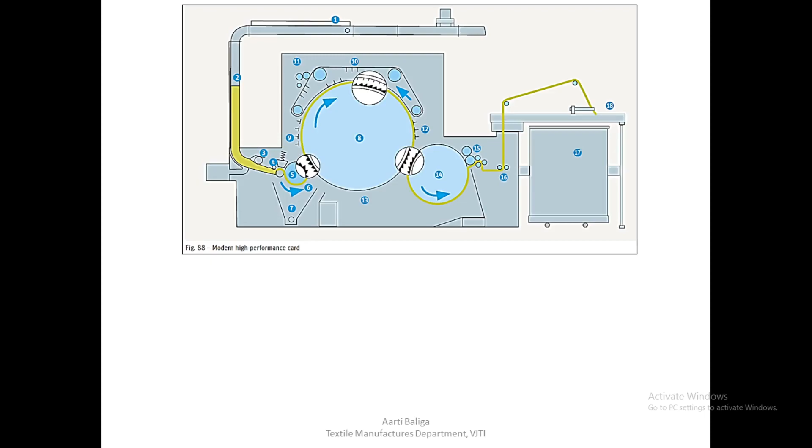Hello, today we shall study the feed and delivery of the card. This is the card which we have seen superficially, and we have seen all the parts. Let us now concentrate on each and every part here. We have already studied the cylinder and the flats in detail, so now today we are going to study the licker-in and the cylinder as well as the feed roller area.

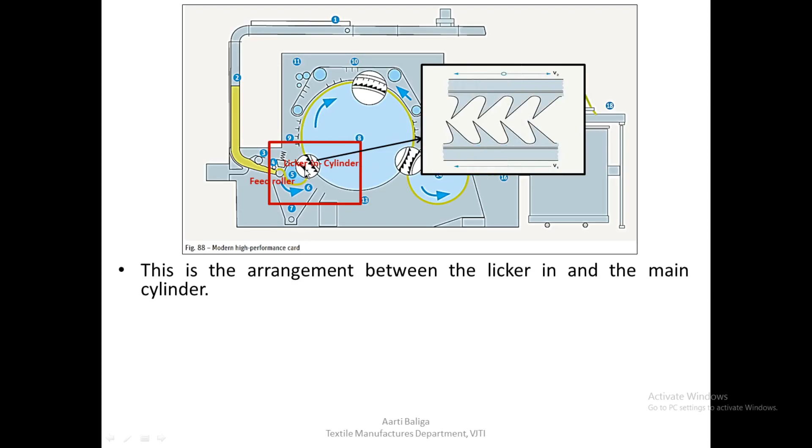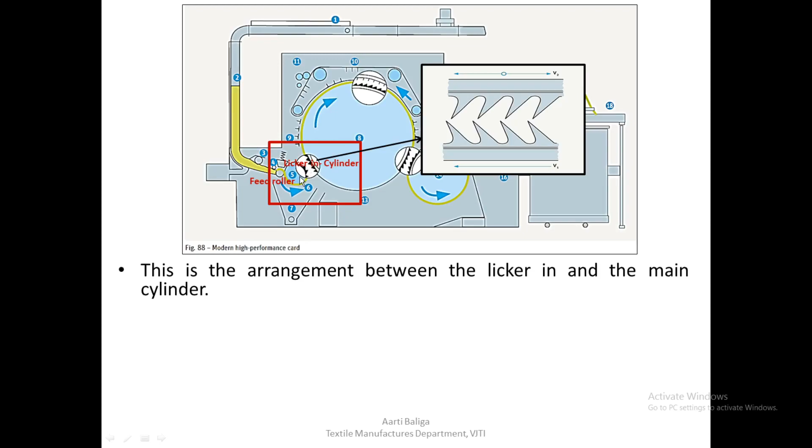This is the arrangement between the licker-in and the main cylinder, showing the arrangement of teeth between them. As one can see, the wires are pointing in the same direction, unlike before when we studied between cylinder and flats, where it points opposite for carding to take place. Here it is in the same direction, because we need the licker-in to transport or give the fibers to the cylinder. The teeth of both the clothing surfaces face in the same direction, as one can see.

This arrangement is typical of the licker-in main cylinder region. Here there is a deliberate transfer of material from one clothing surface to the other, but V1 must be greater than V2. That means the feed clothing surface speed, V2, must be less. The cylinder surface speed therefore must be greater than the licker-in speed.

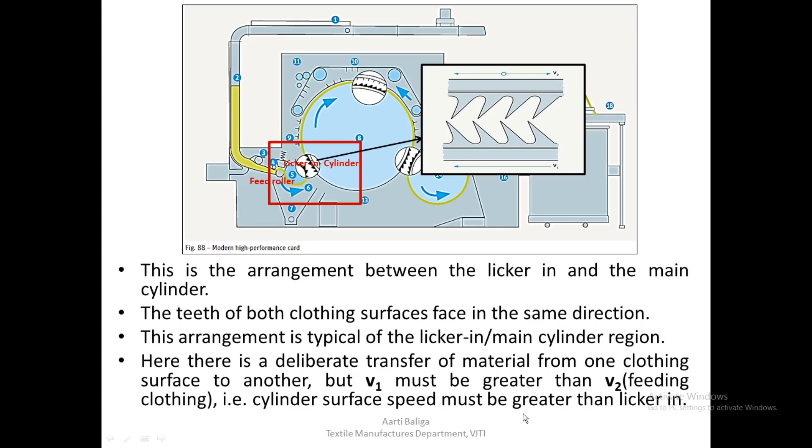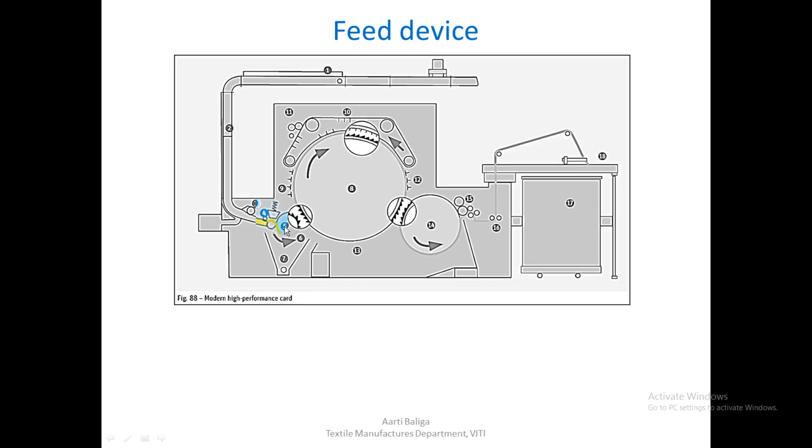So now let us look at the feed device. This is the feed device. We are going to look at the feed roller and the licker-in. It can be seen here, an enlarged view of this small feed roller, and one can see the plate at the top, and this is your licker-in.

Feed roller 2 is located below, and feed plate 1 is pressed against the roller by a spring. There is a spring here, and by spring pressure this is pressed against the feed roller. Licker-in 3 rotates in the anti-clockwise direction, while the feed roller rotates in the clockwise direction. So the material will come from above the feed roller and go below the licker-in, like this.

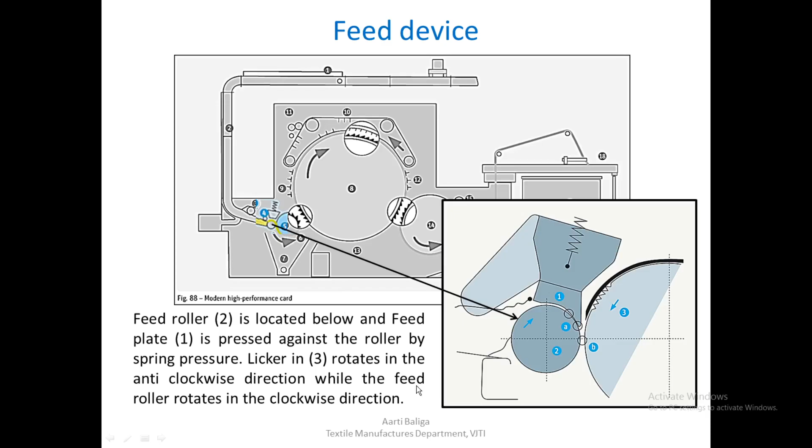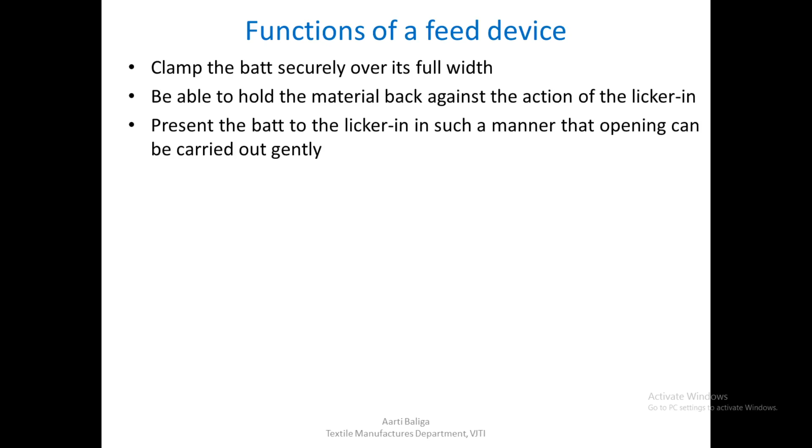So let us look at the functions of a feed device. It should clamp the batt securely over its entire width. It must be able to hold the material back against the action of the licker-in. It must be able to present the batt to the licker-in in such a manner that opening can be carried out very gently.

The licker-in here would have a very high speed which will try to pull out or pluck all the material that is held here. So to give some better resistance to the material flowing into the licker-in, flutes are given on the feed roller, which provide a very good grip and restrain the fibers from easily going into the licker-in.

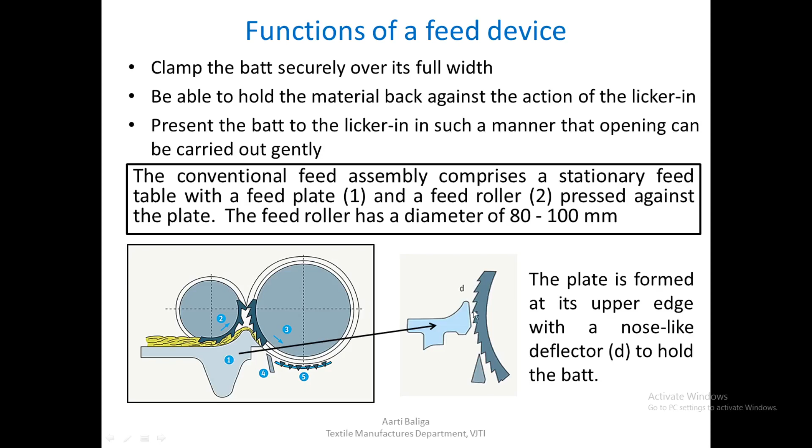So let us look at the detail of this conventional feed plate, which is shown over here. This is D over here, and this is the licker-in, this is the mote knife. The plate is formed at its upper edge with a nose-like deflector, shown here as D, to hold the batt.

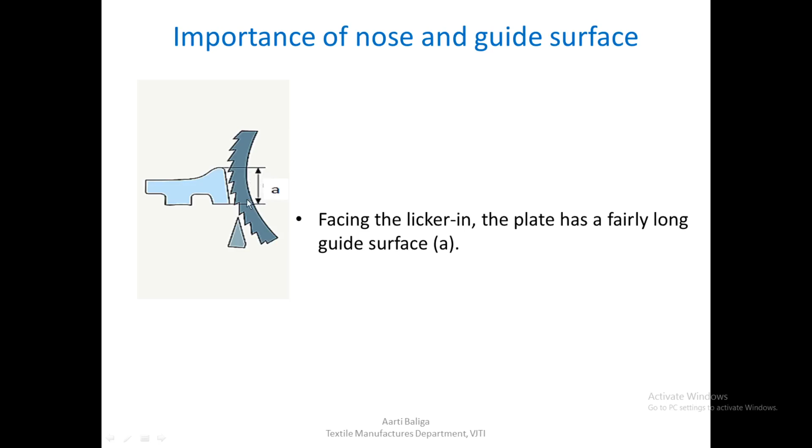Importance of the nose and the guide surface. Facing the licker-in, the plate has a fairly long guide surface, labeled A. As one can see if one looks at this height, it is shown as A, with a fairly long guide surface facing the licker-in. The deflector nose and the guide surface have a significant influence on the quality and also on the quantity of waste eliminated.

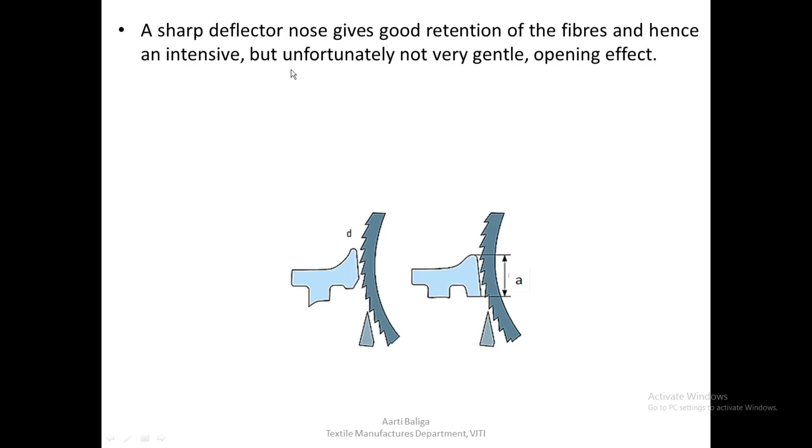A sharp deflector nose, something like this, gives good retention of the fibers and hence an intensive but unfortunately not very gentle opening effect. On the other hand, an over-rounded curve results in poor retention, so the fibers will not be held so securely, and also poor opening at the same time. In this case, the licker-in often tears out whole clumps of fibers.

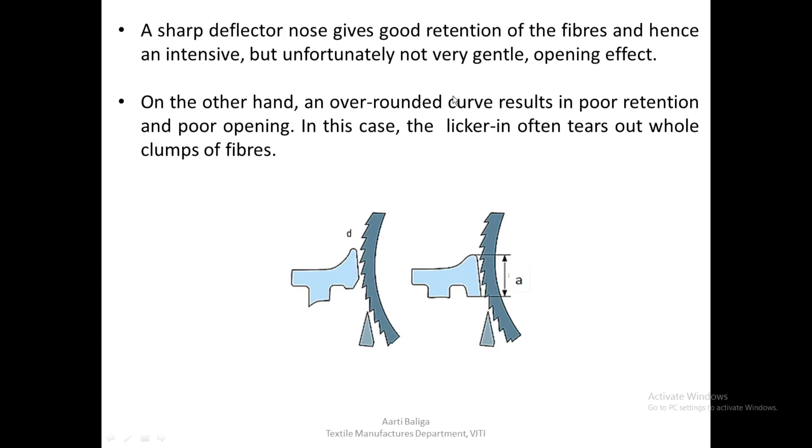So these are the two shapes of the nose and the influence they have on the retention of the fibers. The length of the guide surface also matters, which we have seen as the distance A. That also influences waste elimination.

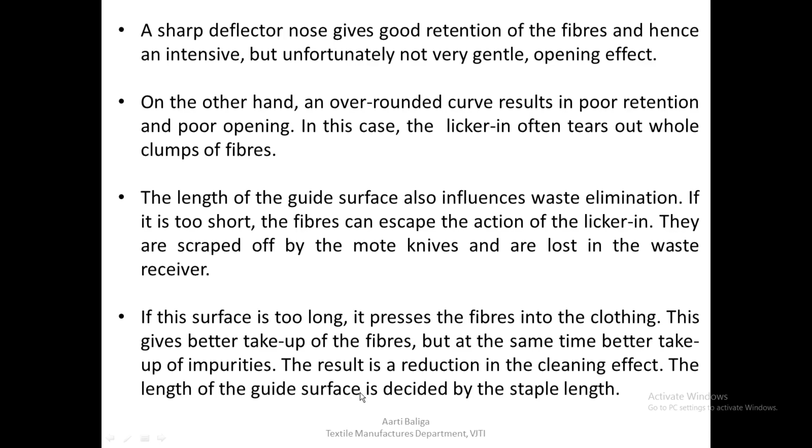If it is too short, the fibers can escape the action of the licker-in. They are scraped off by the mote knife and are lost in the waste receiver. If the surface is too long, it presses the fibers into the clothing. This gives better take-up of the fibers, but at the same time better take-up of impurities also, so the result is a reduction in the cleaning effect. The length of the guide surface is always decided by the staple length of the fiber being processed.

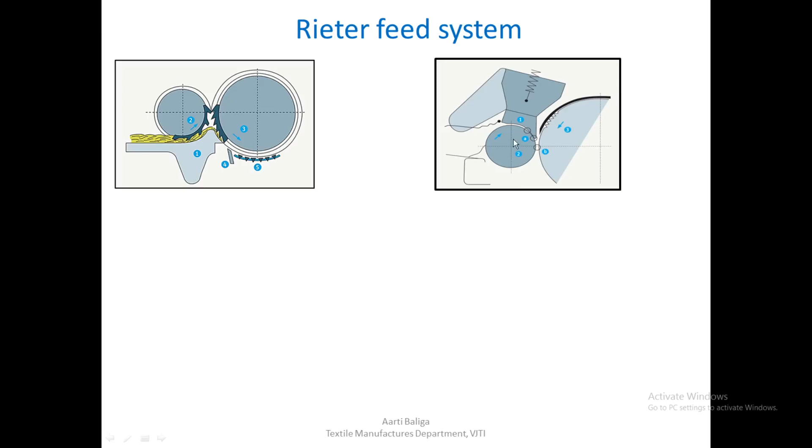Let us look at this. This kind of diversion, the conventional one, does not contribute to gentle fiber treatment. Hence Rieter has converted the feed system to enable material to be fed in the direction of rotation of the licker-in. The arrangement of the feed device is opposite to that of the conventional. The feed roller is located below and the plate is pressed against the roller by spring pressure.

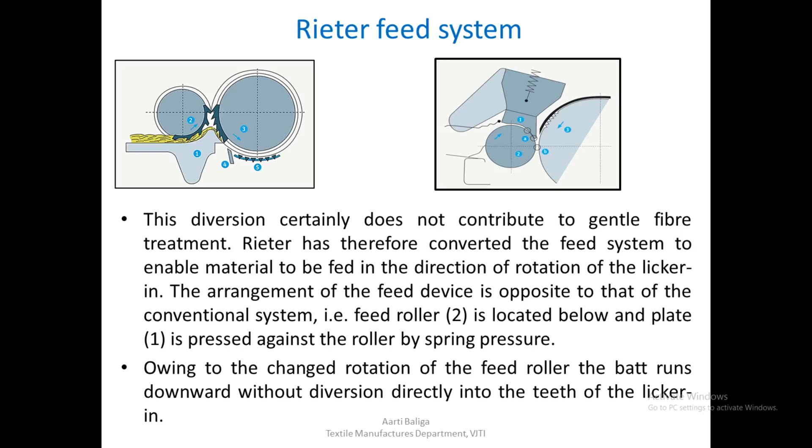Due to this change in rotation of the feed roller, the batt runs downwards without diversion directly into the teeth of the licker-in. So if we observe this system, the feed roller has to rotate in the clockwise direction, and the licker-in as before rotates in the anti-clockwise direction. What one can see is the material going directly, and in this region the material is moving downwards. The licker-in is also taking the material downwards and taking it onto itself. So what is happening is the material is smoothly taken away gently without any opposing forces, and the treatment given to the batt is much gentler.

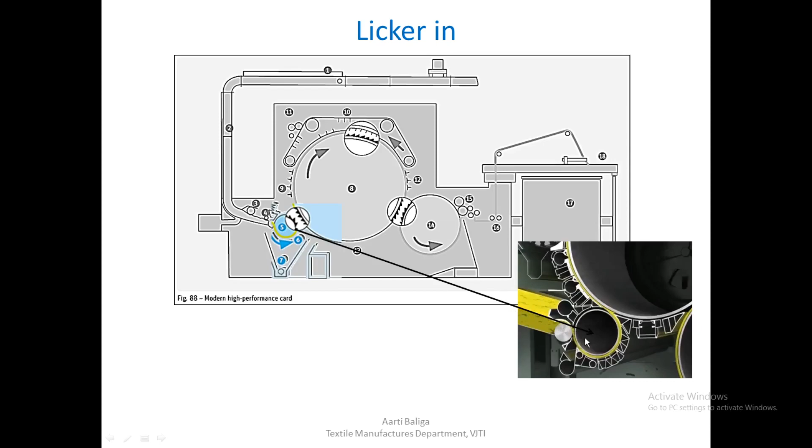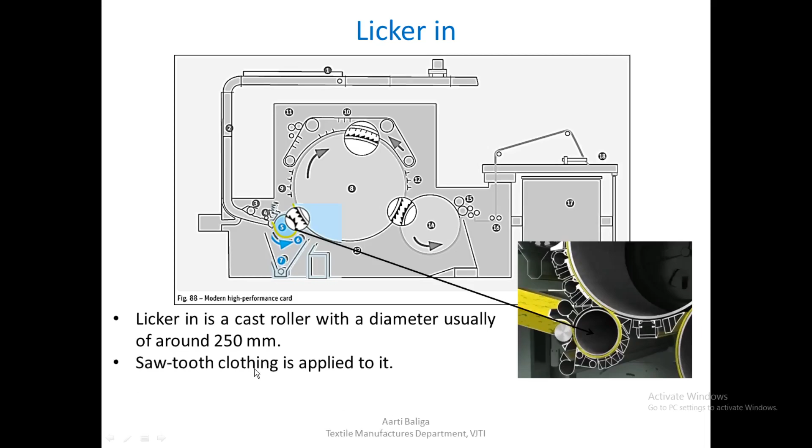This is the image. We have this feed roller, the Lickerin, and the cylinder. Lickerin is a cast roller with a diameter usually of around 250 mm, fitted with a sawtooth clothing. The Lickerin rotates anti-clockwise while the cylinder rotates clockwise. Now we are looking at the relation between the Lickerin and the cylinder.

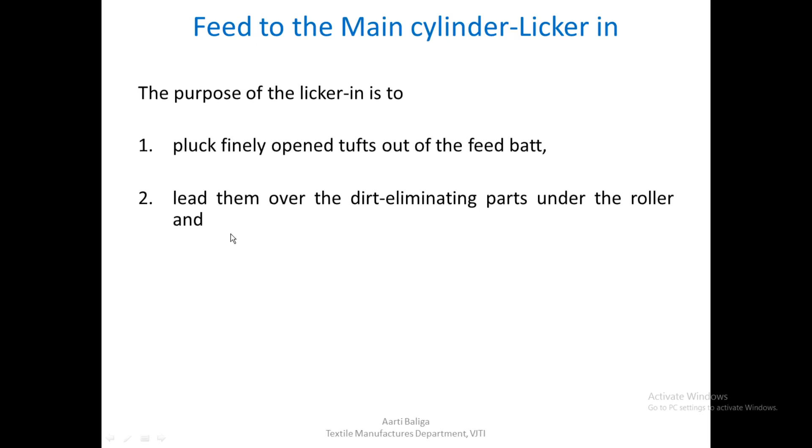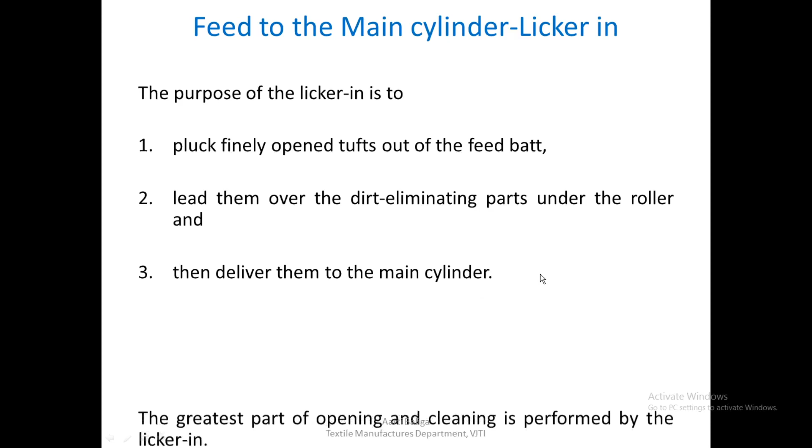Feed is given to the main cylinder by the Lickerin. The purpose of the Lickerin is first to pluck finely opened tufts out of the feed batt, lead them over the dirt eliminating parts under the roller, and then deliver them to the main cylinder. These are the three main functions of the Lickerin, and the greatest part of opening and cleaning is performed by the Lickerin only.

So, waste elimination in the card. Waste elimination takes place at three regions in the card: first below the Lickerin, secondly in the auxiliary elements, and third at the flats, which is the important place where again cleaning happens, or 100% impurities are removed, actually at the flat cleaning device. We shall see all three regions.

Since we are discussing the Lickerin, we shall first see the waste elimination area below the Lickerin. In the conventional system, this was the situation: waste elimination is very intensive and takes place under the Lickerin by means of special devices.

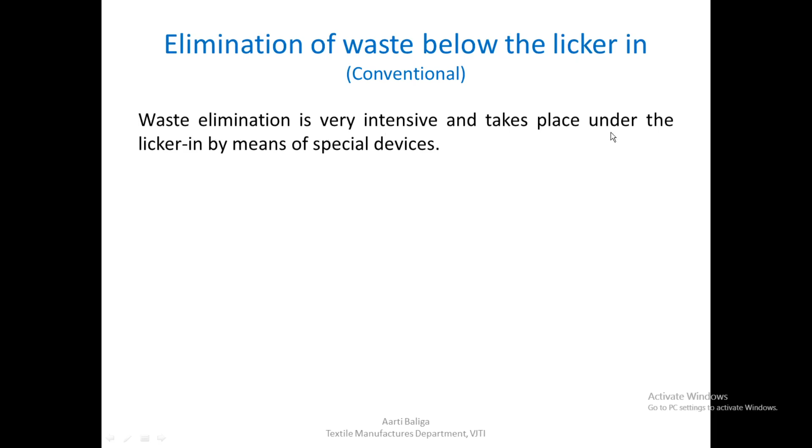The classic cleaning assembly consisted of one or two mote knives and a grid. In the old system, there were just one or two mote knives, which we shall see. There would have been a grid, which we studied during the Blow Room. It is nothing but cross-sectional, triangular cross-sectional rods fixed below the assembly, allowing the trash to pass through.

This grid, however, was half made of slotted sheets and the other half made of perforated sheets, so that whatever trash is removed by the Lickerin goes through these perforated or slotted sheets and into the trash box.

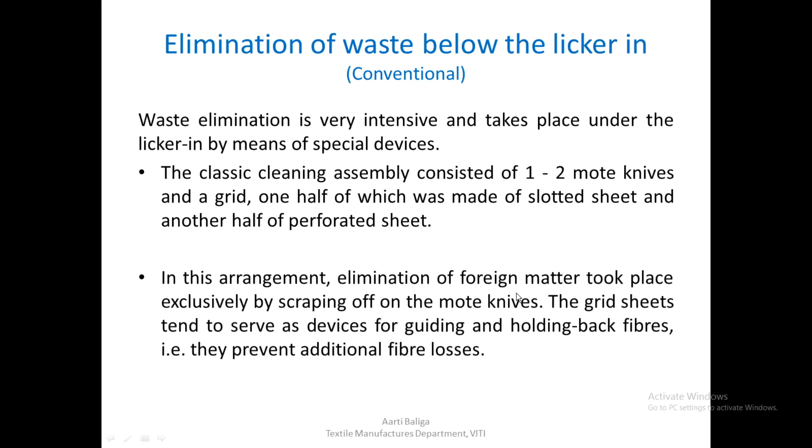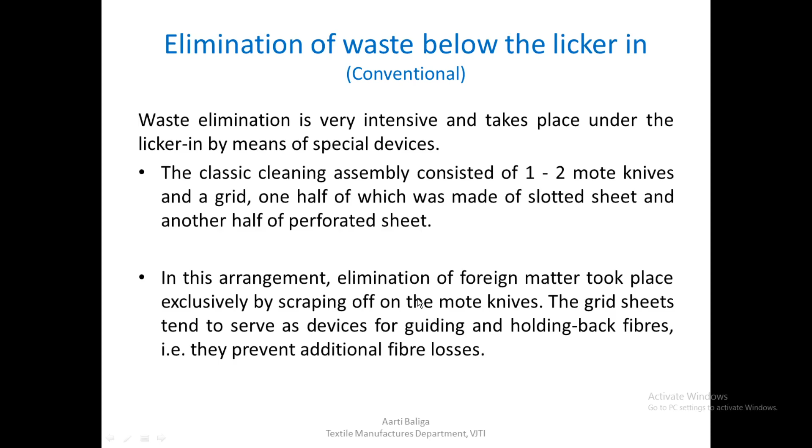In this arrangement, elimination of foreign matter took place exclusively by scraping off on the mote knives. The grid sheets tend to serve as devices for guiding and holding back fibers, and they only serve the purpose of guiding as well as preventing additional fiber loss. These are the two major functions of the grid below the Lickerin.

Now, in the modern system, the zone below the Lickerin has changed slightly for the better. Beneath the Lickerin, there is an enclosure of grid elements or carding segments, which we shall see in detail, and above it is a protective casing of sheet metal to cover the Lickerin.

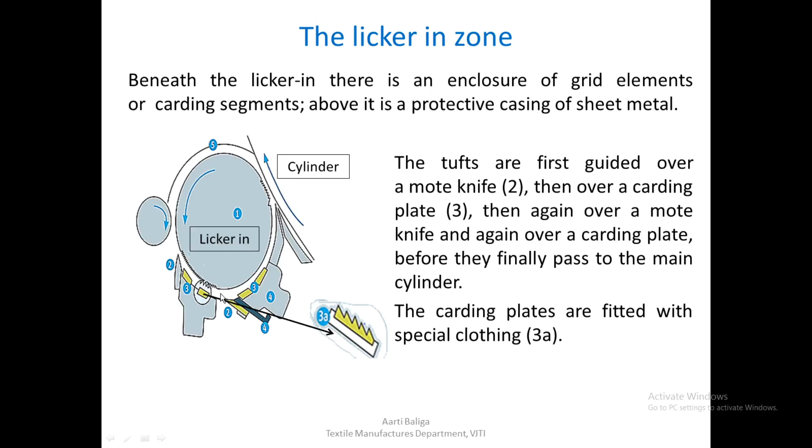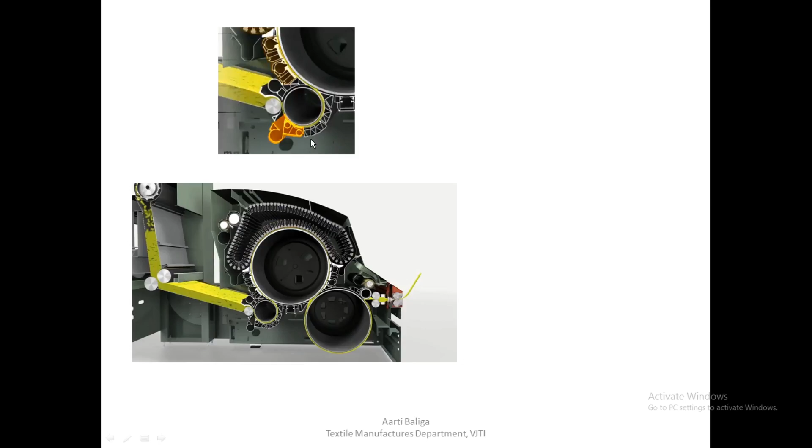Now let us look at a slightly more modern system, where again there is a mote knife, but also a suction system applied here. One can see the feed roller and feed plate sending material to the Lickerin, and this system with a mote knife and suction shown here. The opening at the Lickerin is around 40 mm, and one can see the amount of trash removed, with some amount of fiber also lost over here.

If we were to open this further, this system has been shifted in the anti-clockwise direction. This system has moved like this, and the gap has been increased gradually to 55 mm, and one can see the drastic improvement in removal of trash. But along with that, we also know that we are going to lose some fibers.

This system can be moved still further, and the opening has been made 70 mm over here, and the trash removal has further increased, as well as the fiber lost is also increased at the same time. So now the same thing we shall carefully see in the form of an animation which is shown over here.

So one can see this highlighted area over here. We are going to look at that in detail. The others are the auxiliary elements here as well as the flat, which we shall see later on.

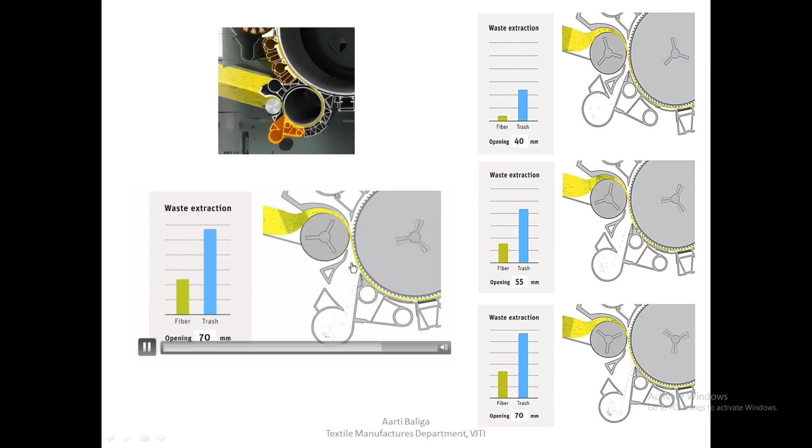So it is this diagram where the material is being scrapped over, and if you move this element like this, the opening here increases and the trash extracted can be increased depending on the kind of material that we are processing. So with this, we come to the extent of opening by licker-in.

In machines with only one licker-in, opening is performed to an extent where more than 50% of all fibers pass onto the surface of the main cylinder in the form of tufts and slightly less than 50% in the form of individual fibers. So we are looking at what kind of performance the licker-in is going to give us.

The material that is fed to the licker-in, 50% of the fibers are passed on to the surface as it is without much opening, that means in the form of tufts, and around equally the same amount of material is opened out into individual fibers and fed to the cylinder.

So one must remember that if the fibers are fed to the cylinder in the form of individual fibers as far as possible, then the cylinder and flat region would be able to do their job better. That is, the carding action happening between cylinder and flats will happen in a more effective manner rather than feeding the cylinder with tufts.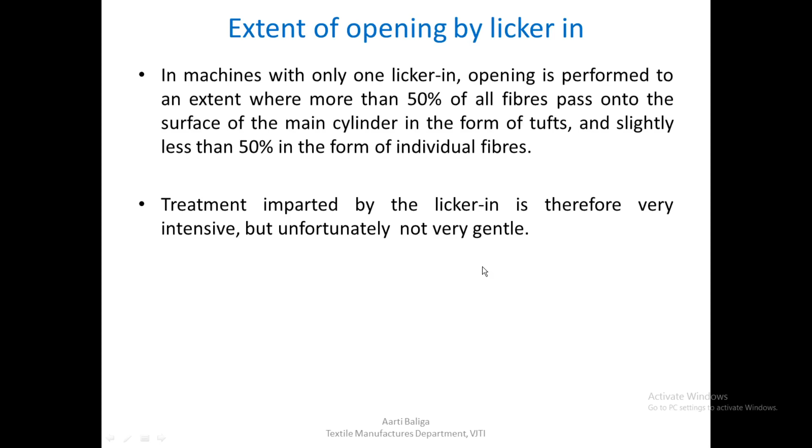So treatment imparted by the licker-in is therefore very intensive, but unfortunately not very gentle. That means 50% of the material is opened, but one finds that the licker-in treatment is not very gentle, meaning there are chances that it may damage the fibers.

With the introduction of modern high production cards, there have been attempts to increase the opening effect. Increasing the number of licker-ins was an approach to improve performance. So now one must understand this concept here.

When it comes to high production cards, modern cards would always give the expectation of higher production, and whenever one says higher production, the throughput or material going through the cards would be more per unit time. In that case the opening as well as the fiber to fiber separation, or all the functions that the card has to perform, has to be very effective. But when production is high and the throughput is high, with the same kind of arrangement, one cannot expect the same level of quality as before.

So one has to make an attempt to increase the opening effect, also the fiber to fiber separation. The effect should be more effective in case of high production cards.

So one attempt to improve the opening effect in case of high production cards was done by increasing the number of licker-ins that would be installed in the machine. So it would look like this. Instead of having one licker-in, one can have up to three licker-ins before the material passes to the cylinder.

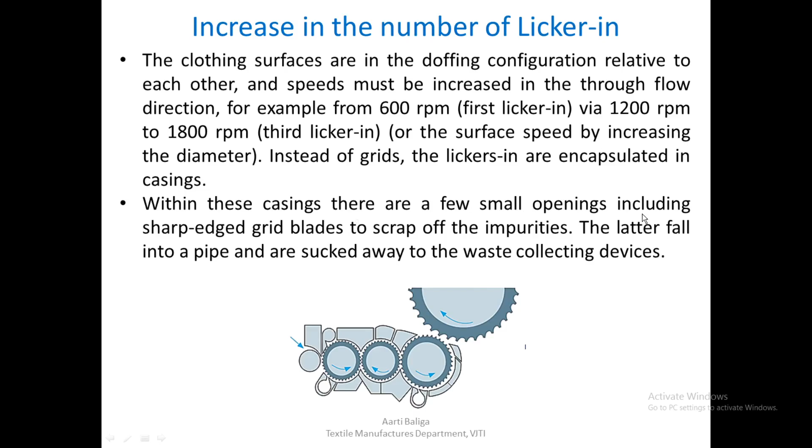Instead of grids, the licker-ins are encapsulated in casings all around them. Within these casings, there are a few small openings, including sharp-edged grid blades to scrape off the impurities. As we have seen, there would be grid blades, and impurities would be removed in these regions. The trash falls into a pipe and is sucked away to the waste collecting devices.

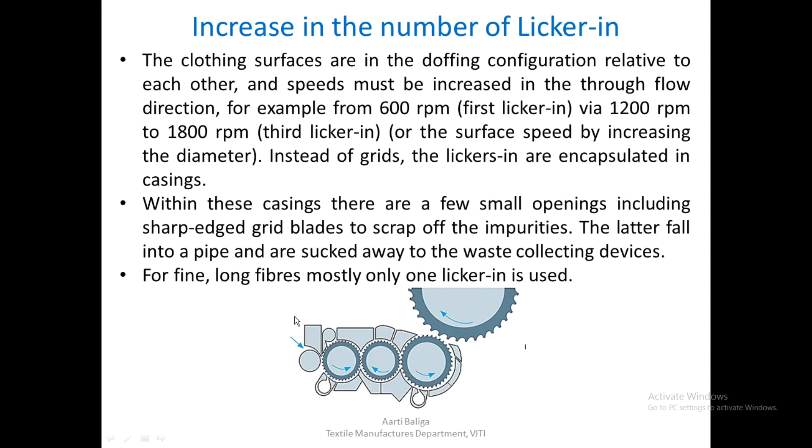This would be the arrangement for higher performance or higher openings in very high production cards. For fine, long fibers, mostly only one licker-in is used. With long, fine fibers, one cannot afford three licker-ins as they will damage the fibers. So only one licker-in is used, and also in case of long fibers, the trash contained in the material is not as high as in short fibers. So one licker-in will suffice for long, fine fibers.

So normally in the mills you would find just one licker-in, and the concept of three licker-ins is hardly seen anywhere. Control of fiber deterioration by licker-in.

Since the action of the licker-in is not gentle, the degree of deterioration can and must be precisely controlled by adjustment of the following parameters. We have already mentioned that the action is in no way gentle. So if one wants to control the aggressive action of the licker-in, what are the factors one must concentrate on so that one can have a gentle treatment in spite of all other factors remaining the same?

The thickness of the batt. So if the material is thick or thin, that affects the degree of deterioration.

The degree of openness of the raw material. If the material is open enough, or fine enough, in terms of thickness, then the licker-in is not able to give a very harsh treatment because the material is already open. It doesn't have to really pluck the fibers very harshly from the feed roller. So the degree of openness of the raw material fed to the licker-in also matters.

If there are proper opening devices in the chute through which the material comes in, and if the degree of openness of the fed material is good enough, even the licker-in will give a slightly gentler treatment to the material and pass it on to the cylinder.

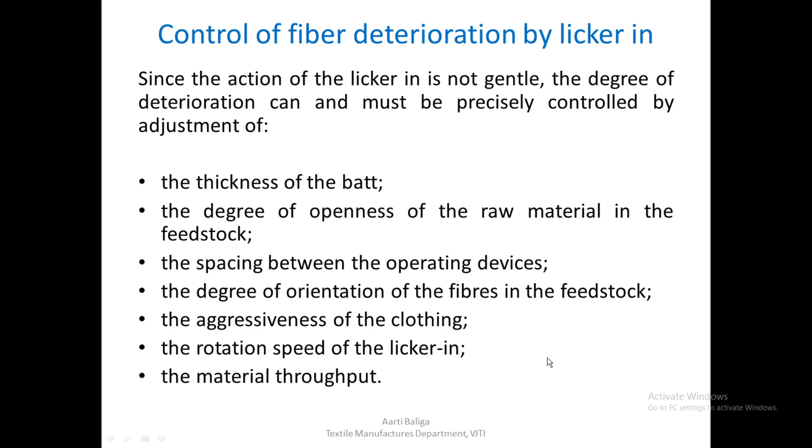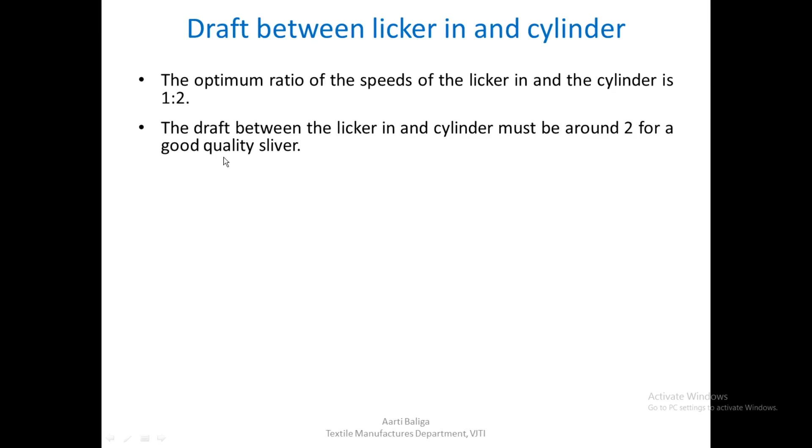So we come to the values of draft seen between licker-in and cylinder. The optimum ratio of speeds of the licker-in and the cylinder is 1:2. The draft between licker-in and cylinder must be around 2 for a good quality sliver. This is the experience, and normally the speed ratios would be in this proportion only. The licker-in runs at 1600 rpm.

In high performance cards, rotation speeds are in the range of 800 to 2000 rpm for cotton and about 600 rpm for synthetics. So we come to the wire point.

For the licker-in wire point, the carding angle is between +5 to -10 at times. So clothing with negative angles is used only in the licker-in when processing some man-made fibers. We have seen what the carding angle is in our previous lecture. From that knowledge, the licker-in can have a carding angle of +5 in a normal case, and if one is processing man-made fibers, then it would even go negative.

Since the fibers are held less firmly by this form of tooth, they are transferred more easily to the cylinder and the clothing is less inclined to choke. In case of man-made fibers, since the material is bulky, we require the material to be effectively passed on to the cylinder without choking, and also a lot of aggressive treatment is not required. So the carding angle would normally be negative when processing man-made fibers.

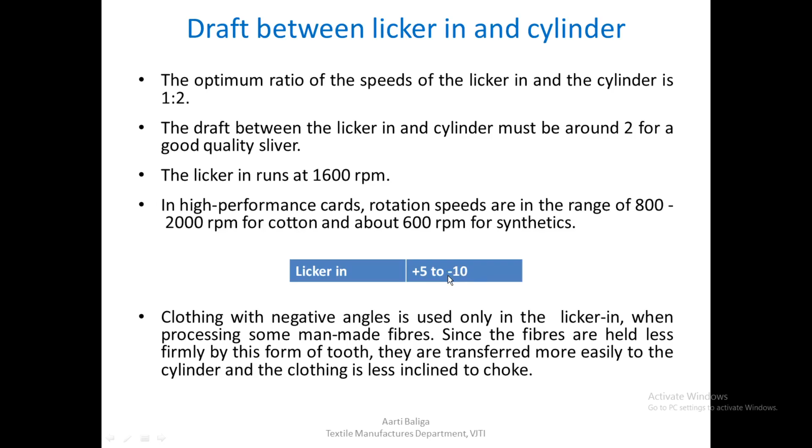Now we come to the auxiliary carding devices, where earlier we had seen that waste elimination happens in three regions in the card. One is below the licker-in, the second was the auxiliary carding devices. Now let us see in detail what the auxiliary carding devices are and the need for them.

The opening effect of the card is represented by the number of points per fiber. We have seen how to calculate this points per fiber, which is the average of the total fibers fed in per unit time over the number of points available at the same time. So the number of fibers versus the number of points available for any action at any given part of the card can easily be calculated by finding the number of points available per unit time in that region, and the average total fibers fed per unit time.

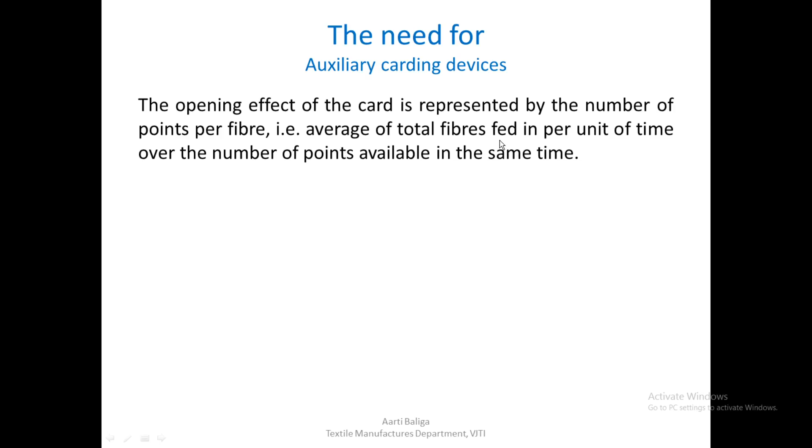At the licker-in, there may be, for example, 0.3 points per fiber, or in other words, 3 fibers per point. At the main cylinder, perhaps it would be 10 to 15 points per fiber. This means there are many more points available at the cylinder, in the cylinder-flat region, which helps better opening there, and that is what we expect: fiber to fiber separation.

Whereas in case of the licker-in, per point there would be around 3 fibers, so one can imagine the ratio. At the licker-in, we are not expecting fiber to fiber separation, so we do not need as many points, but around 3 fibers per point would be sufficient for good opening.

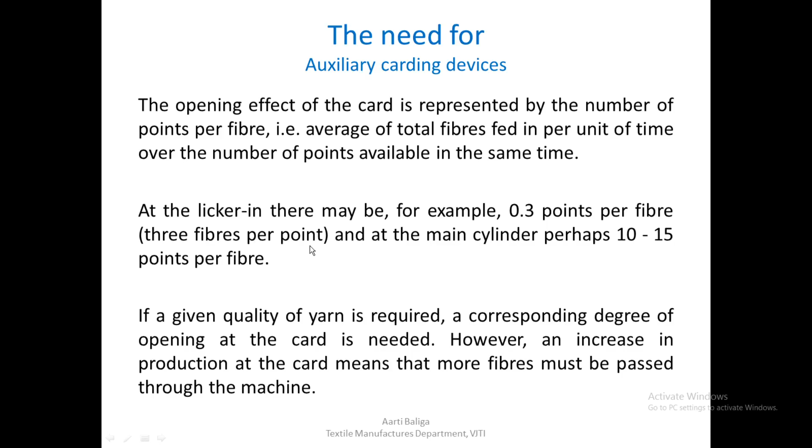If a given quality of yarn is required, a corresponding degree of opening at the card is needed. So when we talk about increasing the production of the card and increasing material throughput through the machine, this has to be considered, because the number of fibers per point should not increase too much, so that the effectiveness of the licker-in is reduced.

However, an increase in production at the card means more fibers must be passed through the machine, and therefore one requires more points wherever possible so that better opening is possible. So, to maintain quality at high speeds, in order to obtain the same carding effect, the same number of points per fiber are required—the number of points per unit time must also be increased.

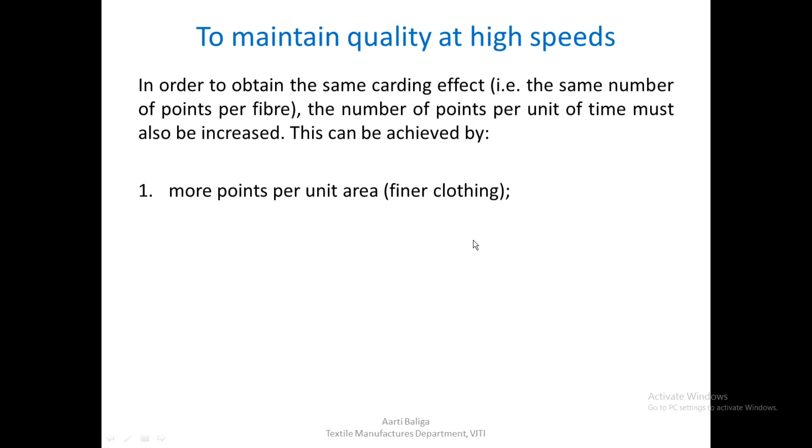This can be achieved by the following: more points per unit area, meaning one can go for finer clothing on the licker-in and increase the number of points per unit area. But this will reach a limit after which one cannot have still finer clothing, because the wire points would become thinner and finer, and mechanically it won't be possible to produce them, since the strength of the wire points would otherwise reduce. So there is a limit to the increase by this method.

One can also increase the licker-in roller as well as cylinder speeds. Again, this would reach a certain limit, because one cannot increase cylinder speeds drastically because of its size.

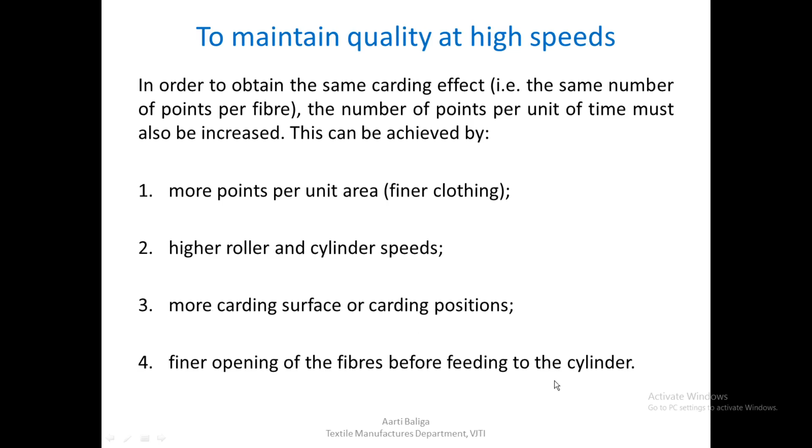Or the third option would be to provide more carding surfaces or carding positions, or even finer opening of the fibers before feeding to the cylinder. So maybe the third and fourth points are slightly possible by improving the feed opening given before it enters the cylinder-flat region, or one can look at increasing the carding surface or carding positions. So little can now be done, so what are the solutions now?

As one can see, little can now be done to increase the number of points, since whatever has to be done has already been achieved. The mass of the fiber also has to accommodate between the clothing. Another reason one cannot go on increasing number of points is because the fiber mass always has to be accommodated between the clothing or the wire points, and if it becomes finer, the fibers would have a tough time accommodating themselves between the clothing region.

Much has already been achieved by increasing speeds, but further increase will prove steadily more difficult. As an example, if the production of the card is increased from 25 kgs to 60 kgs per hour with the same number of points per fiber, the main cylinder must be raised from 300 rpm to 750 rpm. So almost more than double the speed has to be increased just by raising production from 25 to 60 kgs per hour. This would be highly difficult, and cannot be achieved from either the design or the technological standpoint.

So therefore, one effect among many would be severe deterioration of the fibers. Also, one must understand that if we keep on increasing the cylinder speed, there will be severe deterioration of the fibers as well. So as we've seen, the earlier two points, that is increase in the number of points as well as increasing the speeds of the various parts, would be difficult.

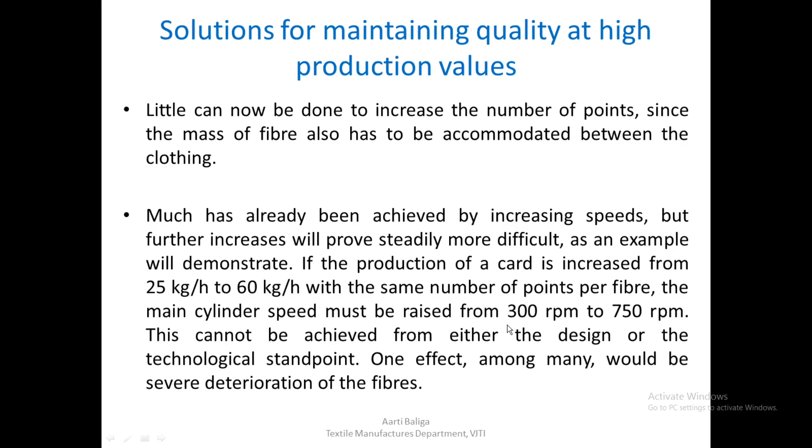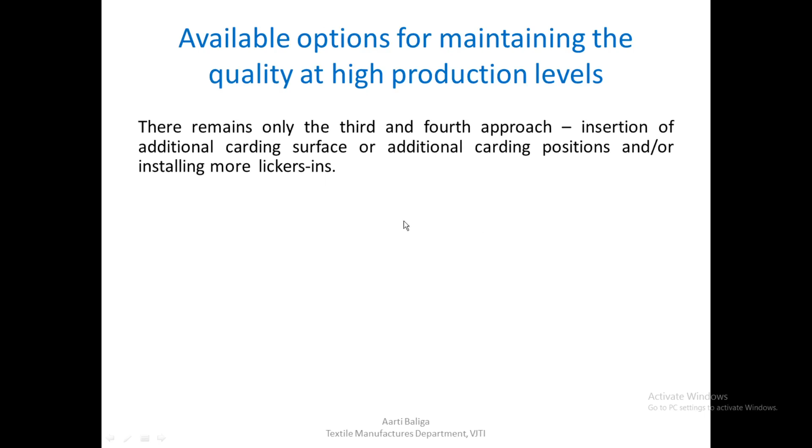So now we are left with only this option, for maintaining quality at high production levels. We are left with the following options: there remains only the third and fourth approach, that is insertion of additional carding surfaces or additional carding positions, and/or installing more licker-ins. This we have also seen earlier. So one can have either this, or along with that, one can also have more carding surfaces. So where can these more carding surfaces be installed?

Let us see. So increase in the number of licker-ins is one option. Then fitting of additional carding plates is another. Both have been put into practice, so both these options have been used. The option of increasing the number of licker-ins has already been explained above. So now, additional carding plates or carding bars.

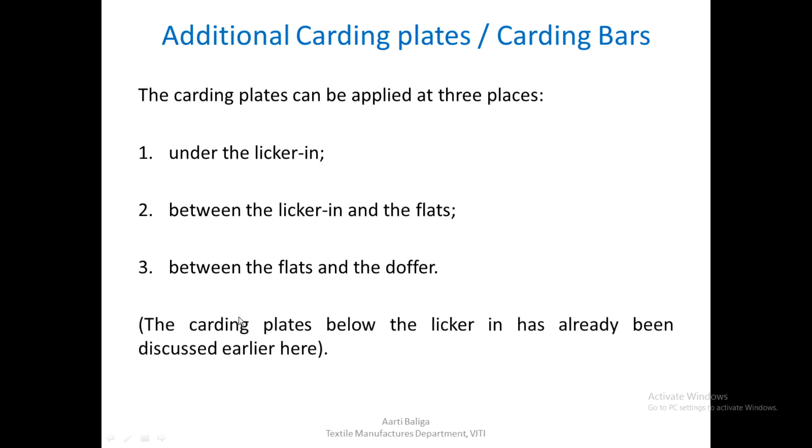The carding plates can be applied at three places. One we have already seen, it is under the licker-in. Then between the licker-in and the flats, which we shall see now, and between the flats and the doffer. Let us see where these second and third positions can be installed, and one can improve the opening action by installation of these carding plates. The carding plates below the licker-in have already been studied or discussed earlier.

So we come to the carding bars, which one can see between the licker-in and the cylinder, just above it. An aluminum carding profile, marked 1, consists of two carding bars, marked as 2. So this is the aluminum carding profile, and on it there are two carding bars facing the cylinder. One advantage of the bar is that they can be provided in different fineness. Unlike the licker-in, where it would be difficult to go for a different kind of fineness, these bars can be easily changed and provided with different finenesses.

They can become finer in the through-flow direction also. So if the material is flowing upwards here, along the direction of flow they could be made finer and finer as we go upwards. Different manufacturers use differing numbers of elements, between 1 and 4 per position. So one can have such elements either 1, 2, 3, or 4. Up to 4 manufacturers do provide these carding profiles or this set per position.

So special clothing is required that must not be allowed to choke. One must observe here that there is no cleaning device, unlike the flats which have a cleaning device. So therefore one cannot allow choking to happen in this region.

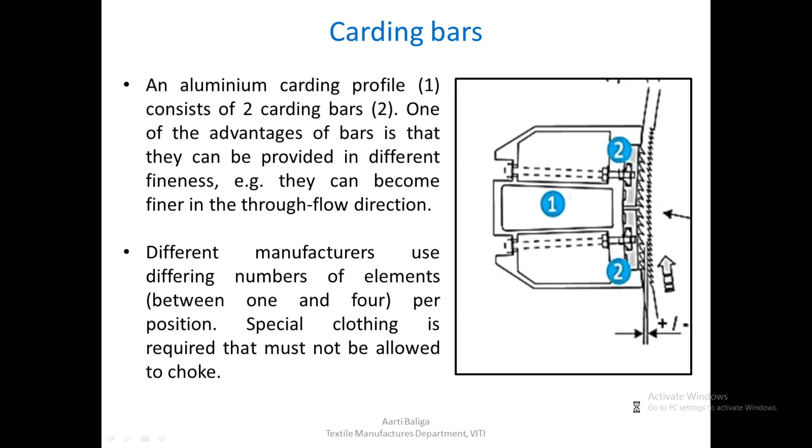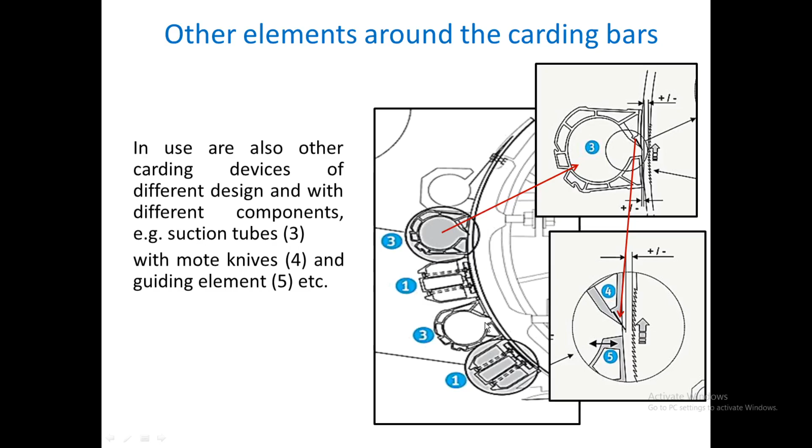So, with mote knives marked 4 and guiding elements marked 5. So this one we'll see more closely. This is your mote knife, marked as 4, and this is the guiding element, marked as 5. So each suction unit has got a mote knife and a guiding element, and these are devices that are there along with the carding bars that we have just seen. So each set will consist of one carding bar, one suction unit with mote knife and the guiding element. One can see here there are two sets.

So let us now look at the animation of the additional carding elements between the licker-in and flats, and also between the flats and the doffer. When it is highlighted in the animation, I may pause the video and we shall take a look at it.

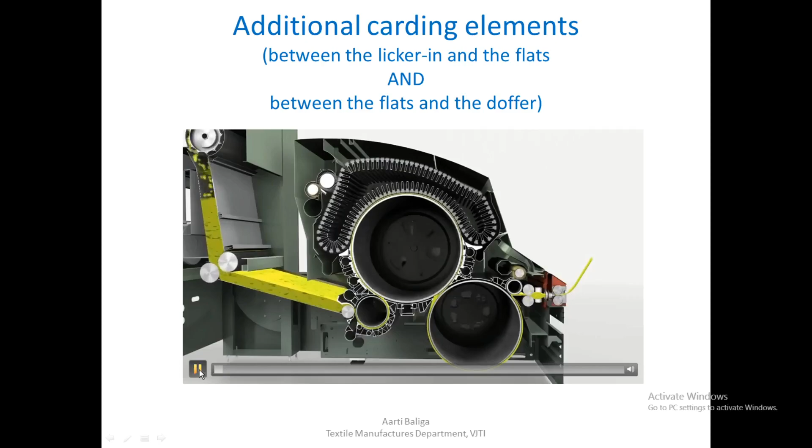So one can see over here the highlighted region, that is below the licker-in. These are the waste eliminating areas. We have seen this already in detail.

Now we have come to these additional carding sections that are shown over here. The third waste elimination area is the flats and the cleaning device shown here. So after seeing this waste elimination region below the licker-in, now we are looking at these regions where the carding bars or carding elements are fixed: one at the licker-in and the flats, that is before the flats, above the licker-in, and the second is between the flats and the doffer, which is near the exit.

So both these are almost similar. One can see the carding bar and the suction device along with it. There is one set which can be seen over here in this, and here there are two sets. Now we shall see this in detail.

As the material is moving over here, one can see the trash removal, with an insert seen over here which shall change in thickness as the video progresses. Here it is 8 mm thickness, and because of this, the space provided, the opening, is lesser, and therefore the trash removed is shown over here.

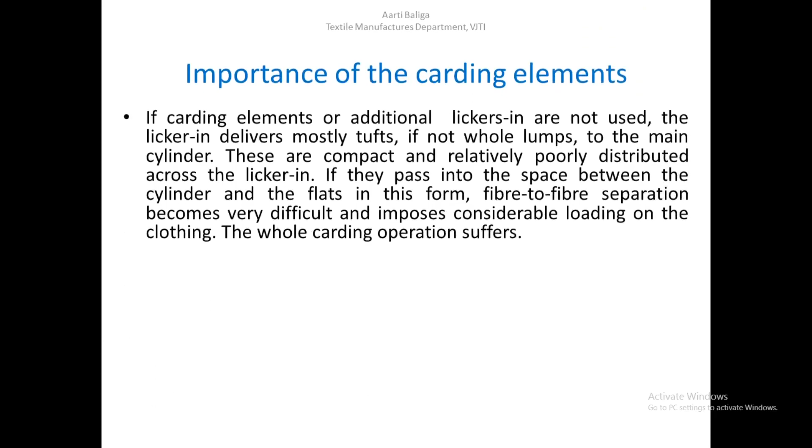But as we go further in the animation, you can see that insert has changed from 8 mm to 5 mm, and this opening has become wider, and therefore the trash has increased, as well as some fibers are lost.

So now that insert will be changed from 5 to 2, and further the trash has increased. This insert thickness can be changed every time to change the amount of trash being removed. So these were the auxiliary or additional carding elements to improve the performance of the card, or the opening performance of the card.

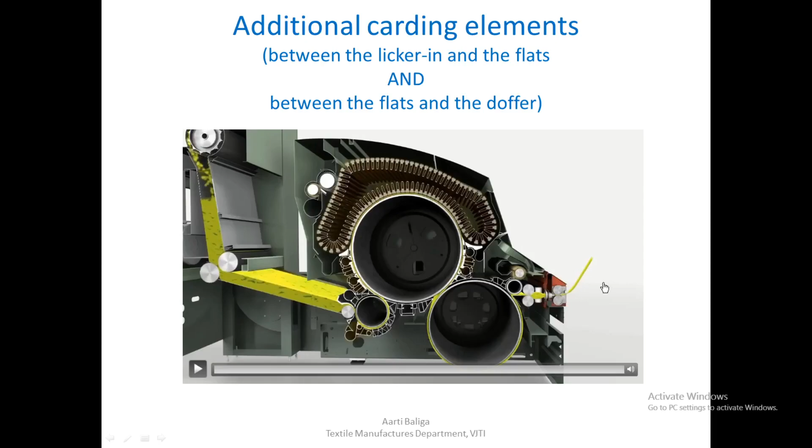So what is the importance of the carding element? If the carding elements or additional lickers-in are not used, the licker-in delivers mostly tufts, if not whole lumps. Although it may not give big huge lumps, it will mostly deliver tufts to the main cylinder. These are compact and relatively poorly distributed across the licker-in. So if they pass into the space between the cylinder and the flats in this form, fiber to fiber separation becomes very difficult and imposes considerable loading on the clothing.

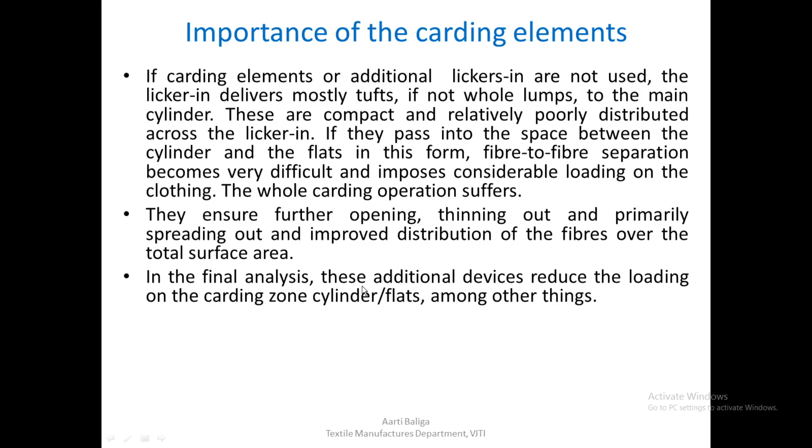The whole carding operation will therefore suffer. So these extra carding elements ensure further opening, thinning out, and primarily spreading out and improved distribution of the fibers over the total surface area of the cylinder. In the final analysis, these additional devices reduce the loading on the carding zone, cylinder, and flat region, amongst other things. The carding segments following the flats create an additional fine carding zone as the fibers rotate 5 to 10 times with the cylinder before they pass to the doffer.

Now we are talking about the carding segments on the output side or front side of the machine. How do they help? The material or fibers rotate 5 to 10 times on the cylinder before passing to the doffer. So there is an opportunity for the fibers to go through the front auxiliary devices almost the same number of times, 5 to 10 times, in between the auxiliary elements. This additional treatment improves both fiber orientation and the transfer of fibers to the doffer. So the carding segments at the output side help, in addition to the opening taking place anyway, improve fiber orientation and also help transfer of fibers to the doffer.

One must remember it is mandatory that the fibers leave the cylinder and go onto the doffer, where they are made to condense, and only then is formation of the sliver possible. There are many other factors, along with these additional carding segments, which help in transfer of fibers to the doffer, so that the transfer is smooth. We shall see it point by point in the later slides.

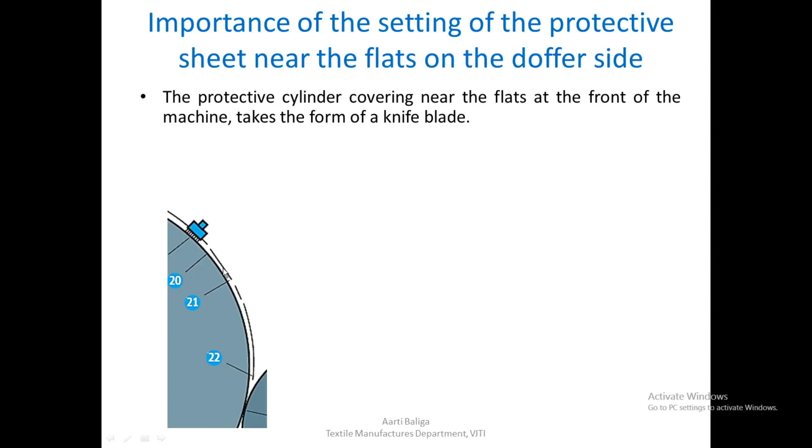This setting is quite important in controlling the flat strips, or the amount of waste removed by the flats. The level and quality of the flat waste or stripping can be influenced by adjusting the distance between this blade and the cylinder. This front plate was also known as a percentage plate earlier.

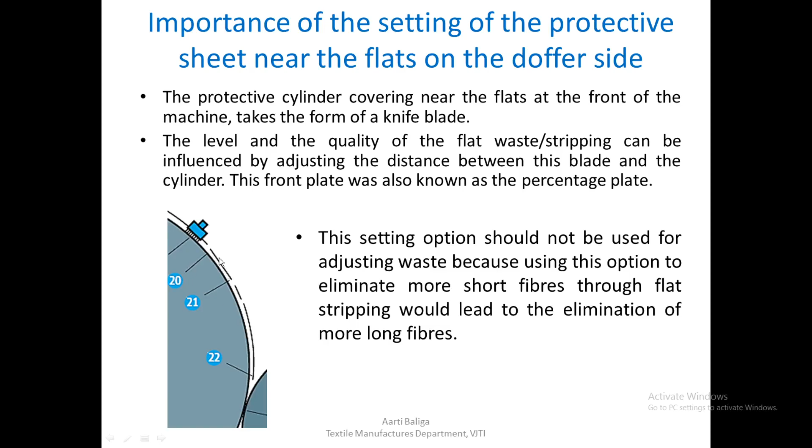This setting option should not be used for adjusting waste, because it is a very critical adjustment. At times it may be used when it becomes very necessary, but as far as possible it should not be touched, because using this option to eliminate more short fibers through flat strippings would also lead to elimination of more long fibers. So if we adjust this to control the waste removed by the flats, along with the short fibers, we tend to lose the longer fibers also. As far as possible, adjusting this plate should be avoided, as fiber loss would generally increase.

The flat strippings depend on the difference in the setting at positions 20 and 21. So with values like 0.85 and 0.38, the difference is huge, and this difference controls the flat strips being removed. Air enters at the top edge of the front plate. If we keep a narrow setting at 21 and a wide setting at 20, air rushes in because the space is more. The air enters from above into this region. So when the setting at 20 is made wider, the difference between 20 and 21 is higher, and the air rushes in with more force at the top edge of the front plate.

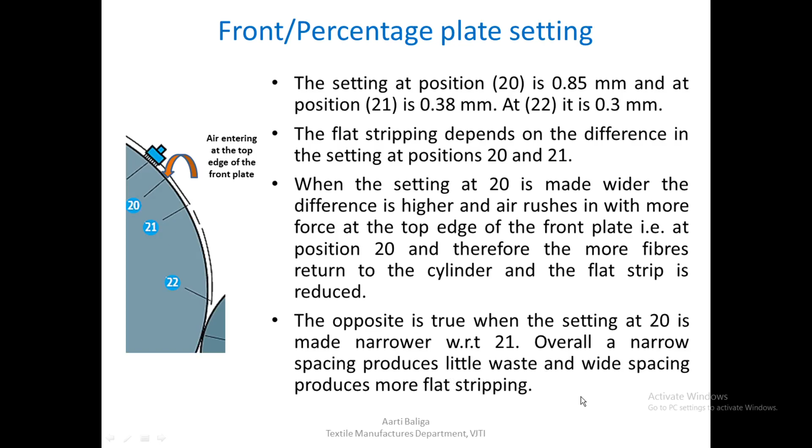So, elimination of waste carried by the flats. There was a third region where waste elimination takes place, other than below the licker-in and the carding segments—the additional auxiliary elements applied on the card. That third important place where elimination of waste takes place is the flats. Elimination of waste by the flats only happens by filling the clothing.

Therefore, the flats must be continuously cleaned. We have seen this earlier when we studied the cylinder and flat region. The flat would enter from here, and it would go...

The cylinder is moving in, say, the clockwise direction, and the flat would be moving in the opposing direction. We have seen both types, forward and reverse motion, and one would go for reverse motion if a better quality output is expected.

So if the flats are moving this way, here the cleaning of the flats takes place, and the flats would return back near the doffer. We have seen the advantages of doing this in our earlier lecture, but now in this lecture we need to see the cleaning device that is present here.

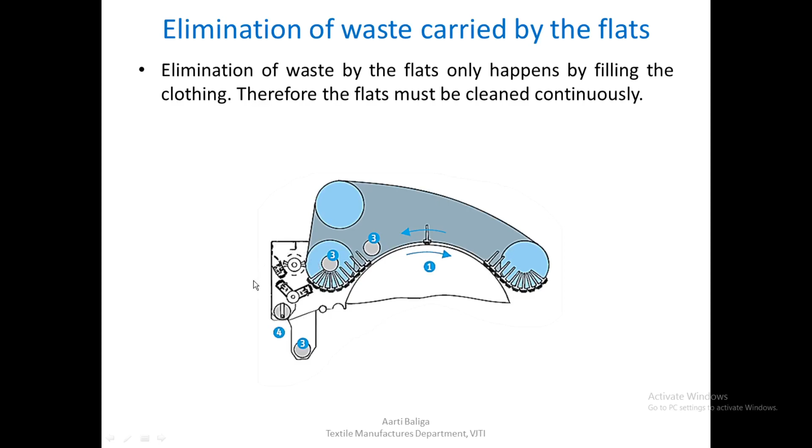They are therefore moved past a cleaning device here. Let us look at the animation and try to understand how this cleaning takes place. We are looking at this region now—this is the cleaning area.

One can see there is a stripping roller which will remove the impurities embedded in the flats. This stripping roller is then cleaned by the brush roller, and whatever is removed goes to the suction.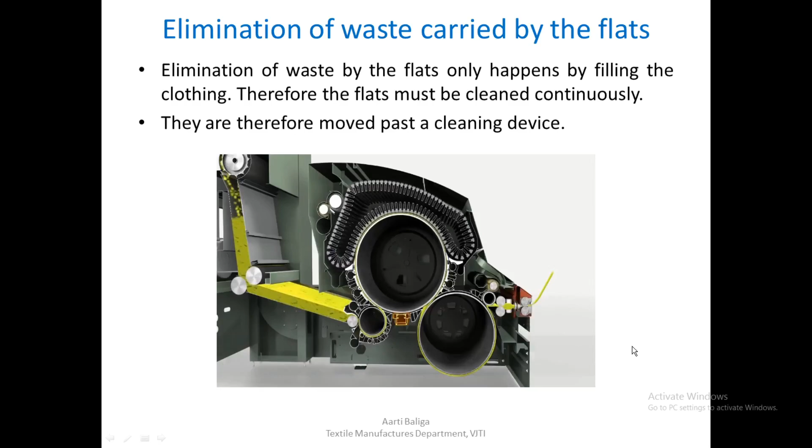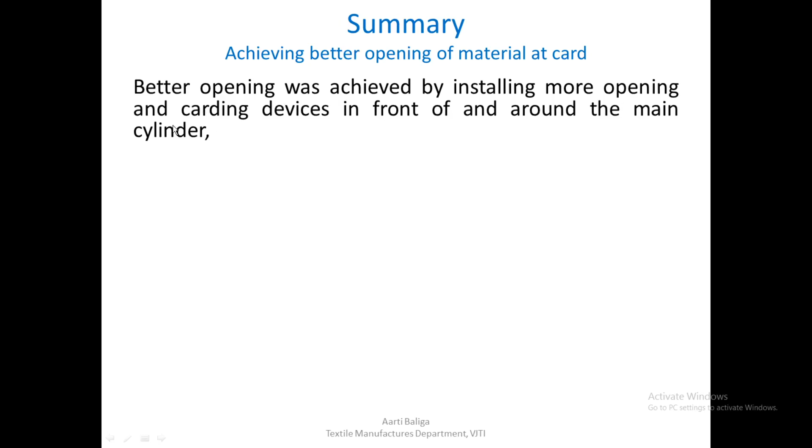With this, we look at the summary of the waste elimination areas. So, achieving better opening of material at the card—better opening was achieved by installing more opening and carding devices in front of and around the main cylinder. An opening device in the feed chute would also help.

A new feeding arrangement, or directional feed at the licker-in—we have seen Rieter's innovation here, where the material is made to go in a certain way along the licker-in so that aggressive action is avoided. One can also have a second and a third licker-in, or have all of these along with carding bars in front of and behind the flats at the cylinder. These are some methods adopted for getting better opening of material at the card.

Now we come to the delivery region. As we said, our lecture consists of the feed as well as the delivery region, and we are going to study both.

Now we come to the doffer region—this is the doffer, this is the cylinder and the flats. Once the material goes through the flat cylinder region and the additional carding segments, it is transferred to the doffer. Now let us look at the doffer in detail.

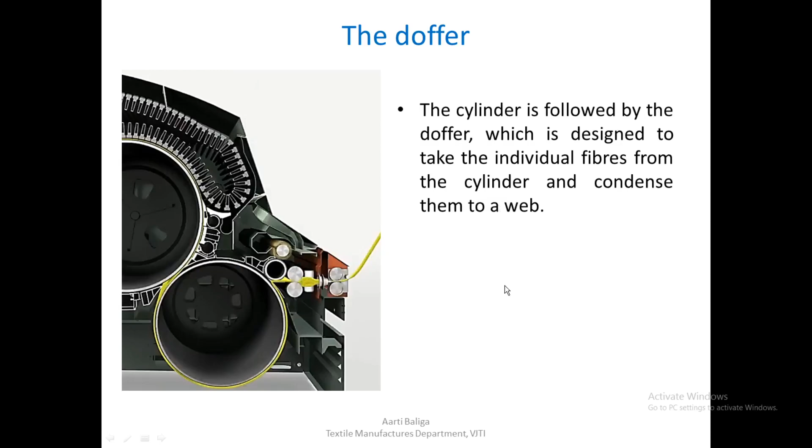The cylinder is followed by the doffer, which is designed to take the individual fibers from the cylinder and condense them into a web. The doffer is mostly formed as a cast iron or steel drum with a diameter of around 600 to 707 mm and a speed of around 160 rpm.

The doffing operation: the clothing between the cylinder and doffer are arranged in the carding configuration. Now, one thing to note is that for fibers to be transferred from one surface to another, one requires a stripping disposition, as we have seen in the licker-in cylinder region, where it should be facing in the same direction so that the material gets easily transferred. The cylinder moves from behind and picks up the fibers from the licker-in and takes them onto itself. So one must have a doffing disposition.

But in this case, when it comes to cylinder and doffer, although we require the material to be doffed, or rather we want the doffer to remove the fibers from the cylinder onto itself, one would expect a doffing disposition of the wire points, but we are going for a carding configuration similar to the disposition between cylinder and flats. That means they are facing in the opposite direction. This is the cylinder and this is the doffer. As one can see, it is facing in the opposite direction, just like the cylinder-flat region, and this is an important point to be noted.

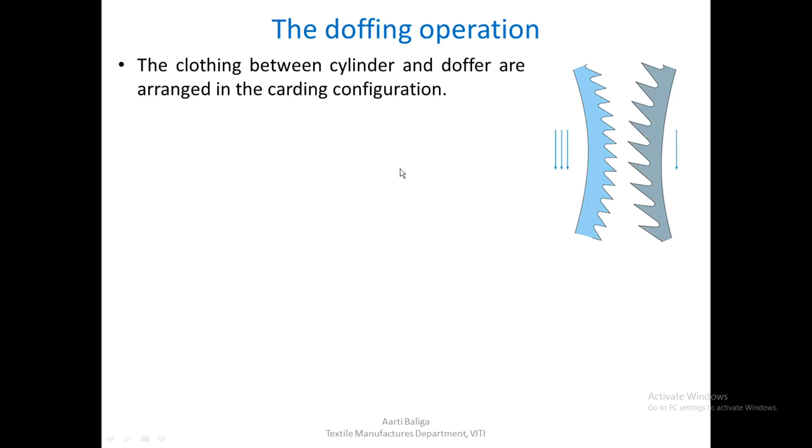This clothing arrangement is essential, done because of certain reasons. The clothing arrangement is essential because the web that is finally delivered must be cohesive, and therefore the fibers must be interlaced with each other.

The fibers must not be allowed to return back to the cylinder. One must understand that the fibers have to be taken up by the doffer, so that some amount of hooking of the fibers is generated in this region, and this can happen only by having a carding disposition, because in case of a stripping disposition, it would just gently take the fibers from the cylinder onto the doffer. But in this kind of carding disposition, more hooks are formed, which is necessary from the point of view of formation of the web, which is a very fine web.

One requires a lot of cohesive forces here between the fibers. They need to be interlaced with each other. Therefore one can see a carding disposition here between the cylinder and the doffer.

The fibers must not be allowed to return to the cylinder. That is another point - once the fibers are transferred, they should never come back to the cylinder. To ensure this, the carding angle as well as the height of the wire points of the doffer is more than that of the cylinder. One can easily observe the carding angle that we have studied earlier. In the case of the doffer, the carding angle is higher, and therefore they are more inclined towards the horizontal, and once the fibers come onto the doffer, they will hold on to the fibers and not allow them to go back. Also, the height of the wire points is clearly higher than that of the cylinder.

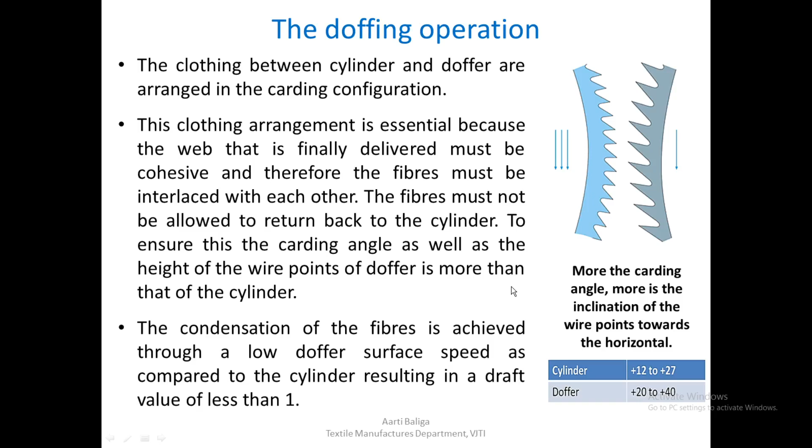The condensation of the fibers is achieved through a low doffer surface speed. As discussed earlier during the calculations, the doffer surface speed compared to the cylinder speed is very low, and therefore the draft applied between the cylinder and doffer is less than 1. This helps the material come onto the doffer and get collected there before we can form the sliver.

So, effects of carding disposition between cylinder and doffer. Having the carding disposition between cylinder and doffer would help in the following ways. We shall see them one by one.

The degree of parallelization that is achieved at the cylinder: at the cylinder and flat region, because of the carding action, fiber to fiber separation happens, and there is a lot of parallelization or orientation of fibers taking place in this region. But as soon as we come to the doffer, or when we want to form a sliver, we do not want that parallelization of fibers.

We want the fibers to hold on to each other, and hook formation is necessary. This has been achieved by having the carding disposition at the cylinder and doffer area, so that the degree of parallelization achieved at the cylinder flat region would disappear. But the random orientation helps to form a web and to doff it.

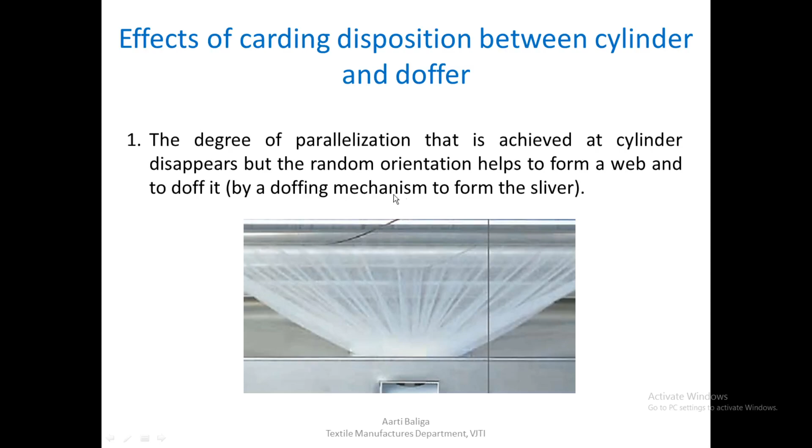Once the hooks are formed between the fibers, the fibers hold on to each other and help form this kind of web, which is doffed from the doffer and goes into the trumpet here, removed by the doffing mechanism to form the sliver.

The other point the carding disposition helps with is the undesirable bending of the fiber ends, which occurs during transfer of fibers, leading to the formation of hooks. Although this would be undesirable in a normal situation, here during transfer, hook formation is necessary for the formation of the web and then the sliver.

Otherwise we would not be able to remove the fibers, because between cylinder and flats the fiber to fiber separation is so high that fibers need to be collected onto the doffer before formation of the sliver.

Also, poor efficiency of fiber transfer from cylinder to doffer is in practice more an advantage than a disadvantage. Because of the carding disposition, fiber transfer might not be as great as with a stripping disposition, but to a large extent it is more of an advantage. Let us see how that happens.

It is a fact that the fibers rotate with the main cylinder about 5 to 10 times. Because they are not immediately taken off onto the doffer, due to the carding disposition, there is an opportunity for the fibers to run around 5 to 10 times around the cylinder before passing onto the doffer.

By providing a carding disposition at the cylinder-doffer region, we allow the fibers to move around the cylinder 5 to 10 times, or be opened out very nicely before being passed onto the doffer. This results in some important improvements, helping in more than one way.

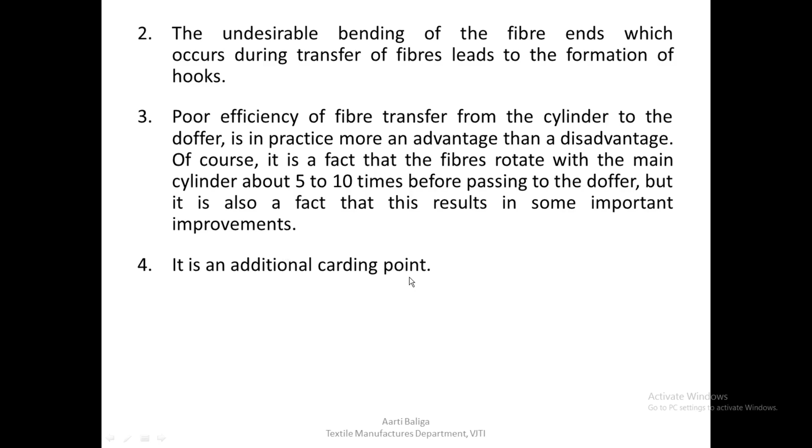So it is an additional carding point. Because it's a carding disposition, it will allow for still better fiber to fiber separation.

The fiber to fiber blending effect also increases because a high degree of intermingling results, which is important for man-made fiber and cotton fiber blending. So the blending effect is also improved.

It produces good diagonal as well as short-term regularity. Because of this good intermingling of the fibers and all the above reasons, there will be good homogeneity achieved, and one can expect good short-term regularity in the output sliver.

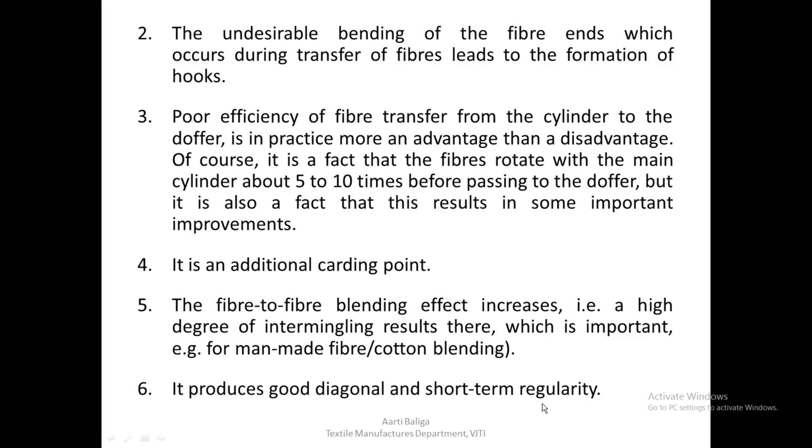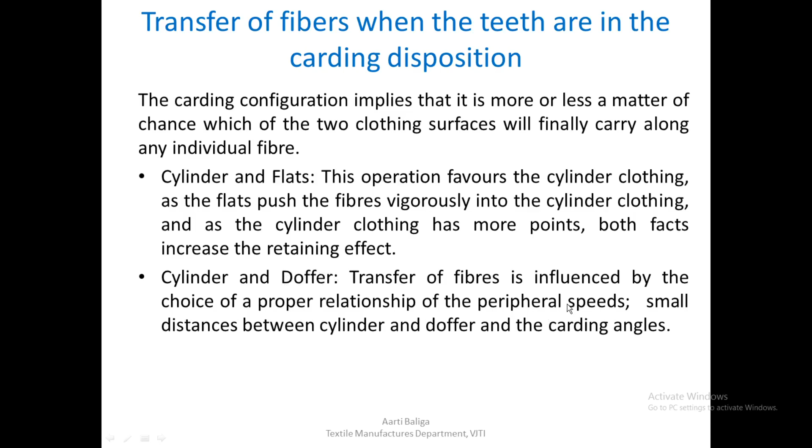Another reason is the carding angle, which we have seen earlier. The carding angle is higher in the case of the doffer, and therefore the doffer is able to retain the fibers from the cylinder. So in the case of cylinder-flat, the cylinder is more effective in holding on, whereas in the case of cylinder and doffer, the doffer would preferably hold on to the fibers because of the speeds, the setting between cylinder and doffer, as well as the carding angle.

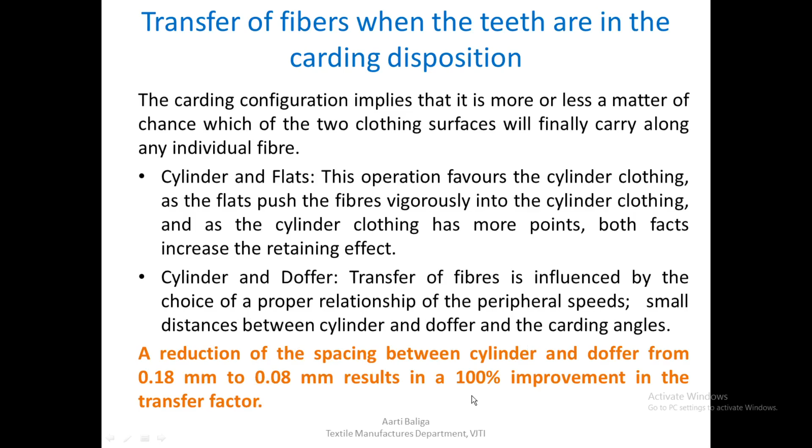For example, a reduction of the spacing between cylinder and doffer from 0.18 mm to 0.08 mm means the spacing has been reduced, that is, the doffer has been brought closer to the cylinder. This results in a 100% improvement in the transfer factor. So the transfer that happens is better the moment we close the setting between the cylinder and the doffer.

Let us now look at the hook percentage distribution. We already know that at the doffer, hooks are formed in the fibers, and those hooks help in making the web and collecting the fibers for formation of the sliver. There are various types of hooks, different types. Let us see them one by one.

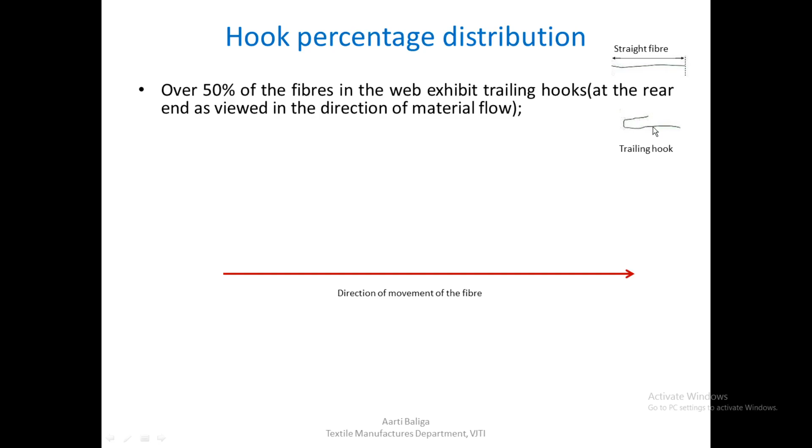If this is a straight fiber, over 50% of the fibers in the web that we have seen exhibit trailing hooks, meaning the hooks are at the rear end. If this is the direction of movement of the fiber, moving from left to right, and the hook is at the rear end behind, since the fiber is moving in this direction, if the hook is at the back side, it is called a trailing hook.

About 15% have leading hooks—that means the fiber is hooked in the front, considering the direction of fiber movement, which is very important. This would be called a leading hook, around 15% only. Another 15% will be double hooks. So one can see 50% trailing, 15% leading, 15% double hooks—that is 30 and 50, 80%, accounted for by trailing, leading and double hooks.

Only a small proportion are delivered without any hook formation of any kind. Some fibers might go straight as is, but the majority would be trailing hooks, a small percentage leading, and some double hooked or in other configurations, with a small proportion delivered without any hook. This hook percentage distribution is very important, because when we study the comber later on, the importance of this will be explained.